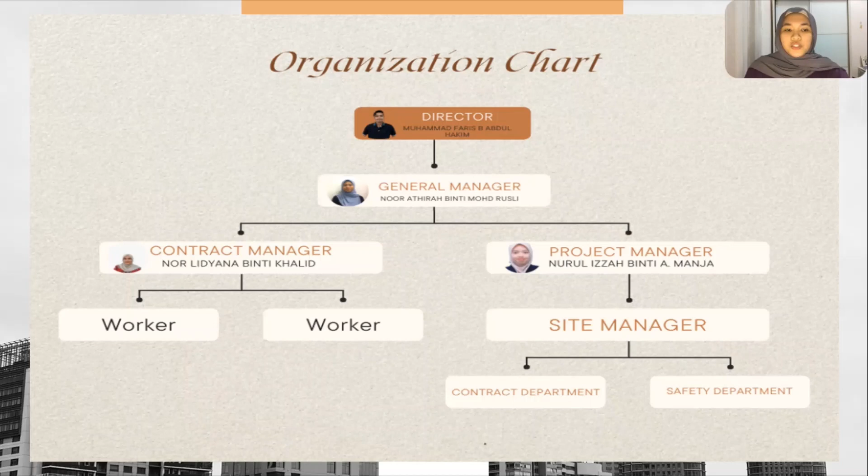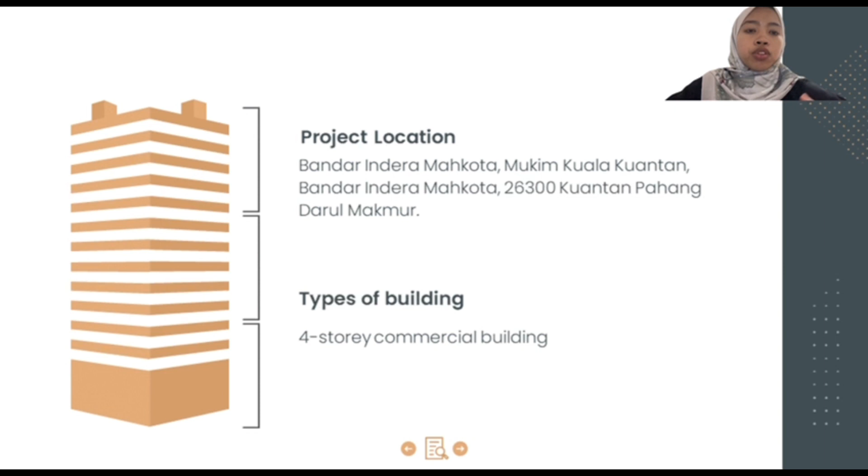Assalamualaikum warahmatullahi wabarakatuh. My name is Nurul Izzah binti A. Manja, CF 200167. I will present about the project background. So the project location is at Bandar Indera Mahkota, Mukim Kuala Kuantan, Kuantan Pahang. The type of building is a 4-story commercial building. So what is the type of commercial buildings? Commercial building can be office building, house commercial activity, warehouses, retail center and resident, or it can be for business professional use.

For the project detail, the project name is the proposal of developing commercial building at Bandar Indera Mahkota, Kuantan, Pahang, and the developer or the client is Sentimental Associate Sdn Bhd. The architect is ATZ Architect, and the C&S consultant, M&E consultant, QS consultant, and the town planner are from our company, which is Berjaya Consult. And the company address is at Jalan Padi Perak, Bandar Baru Uda, Johor Bahru.

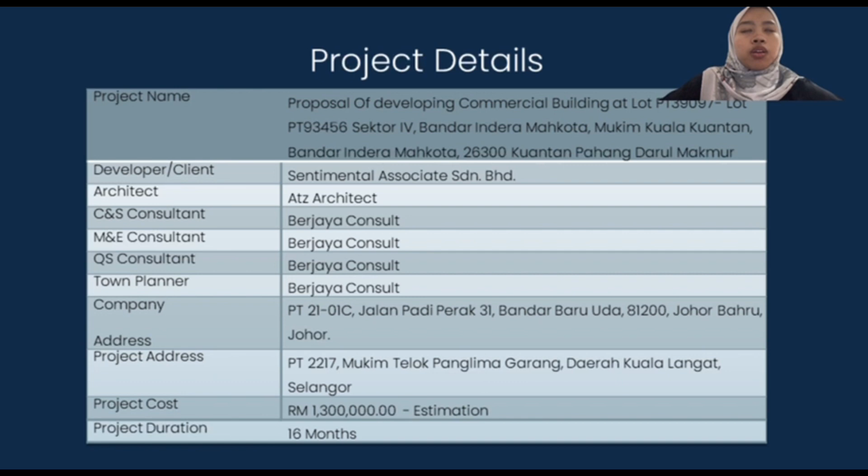Next is the project scope. The commercial building type of space is designed for higher occupancy and can range in size from a single-story building to a high-rise building. In the pre-construction process, all preparation material including bill of quantity, BQ, and drawings such as architectural, structural, mechanical, and electrical drawings must be prepared by our company. The design preparation for the drawing follows the standard specification used, Malaysian standard, which is Euro Code 1 and Euro Code 2.

And lastly, the process of the project also includes the development of infrastructure for the buildings such as earthwork, drainage, sewerage, road, and water reticulation. All the project must comply with the rules and regulations from the local authorities.

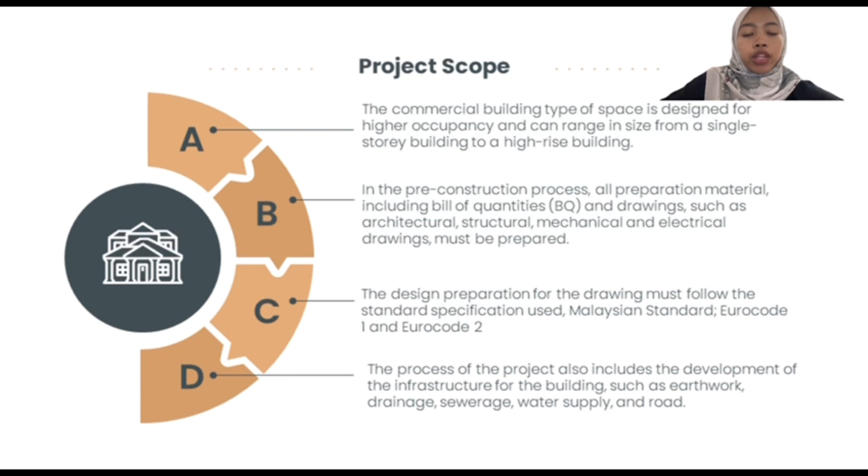Okay, next part, we'll continue with the proposed size and thickness. Depth of foundation. Based on the soil investigation, the chosen foundation to be used is pad footing. It's commonly used for shallow foundation in order to carry and spread concentrated loads caused by columns or pillars. The type of foundation used is necessary to ensure structural safety. When one or more topsoil layers are very compressible and incapable of supporting the load transferred by the superstructure, the bearing capacity is 150 kN per meter.

Okay, the foundation will be categorized into four groups, from Group A to Group D. Group A estimated pile depth is below 4.5 meters, Group B 4.5 meters until 9.5 meters, Group C 9.5 meters until 14.5 meters, and Group D 14.5 meters and above.

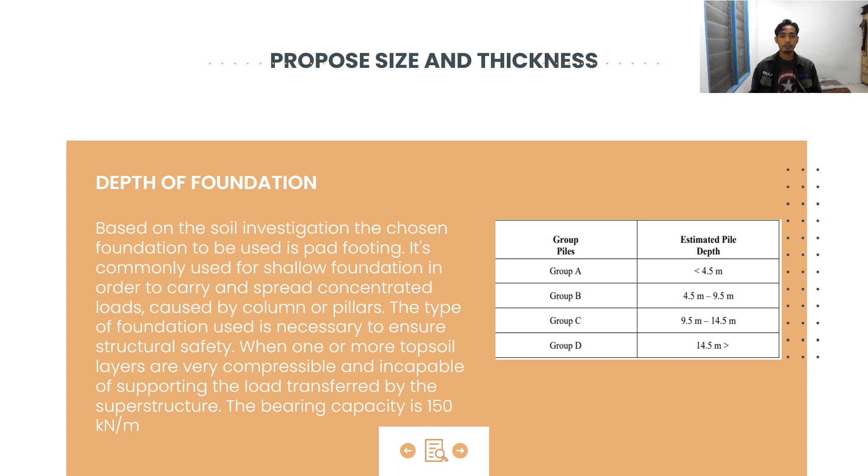The size of the beam. The size of the beam proposed from the ground floor until the third floor is the same, which is the span length and the dimension. The span length is equal to 14,850 and the dimension is 150 times 400 millimeter. So it's the same for the ground floor until the third floor.

Next, for the thickness of the slab. The thickness of the slab proposed is for the span 5A until B, the length is 3,600 and the dimension is h equal to 150 millimeter. Next, for the size of the column. The size of the column proposed from column C1 until column C5 is the same size and the same length, which is the length is equal to 3,000 and the dimension is 400 times 400 millimeter.

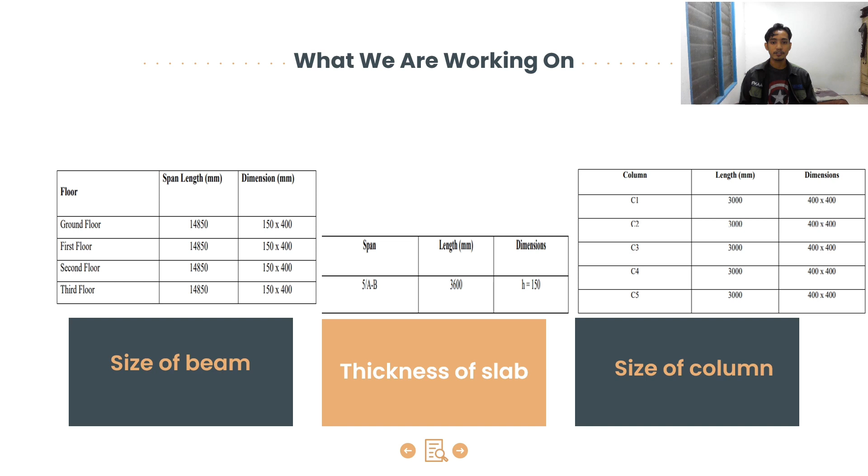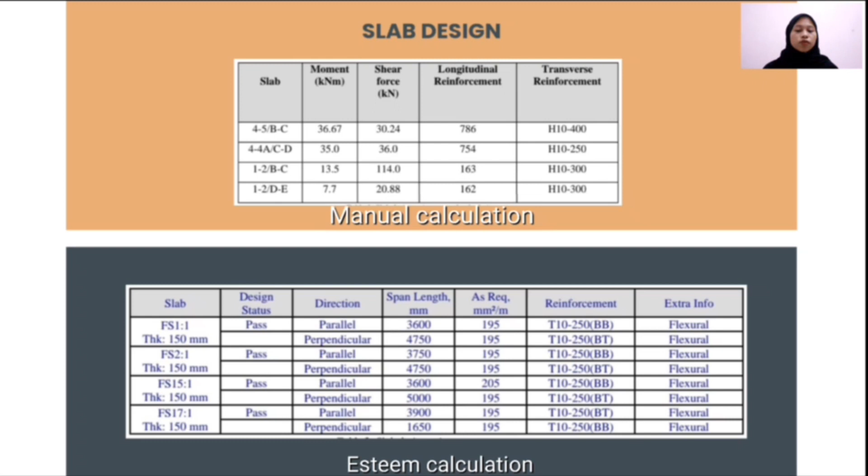Today I am going to present on result analysis. So as you can see, there are two tables, which is the table of manual calculation and the table of calculation from Esteem. For slab design, we provide transverse reinforcement with size ranging between H10-250 to H10-400. Compared to Esteem software, they provide reinforcement with size T10-250 for all sections. While for beam design, from manual calculation, we provide reinforcement with size H6-100 to H6-300, and based on Esteem software, provided reinforcement is T10-250 for all sections.

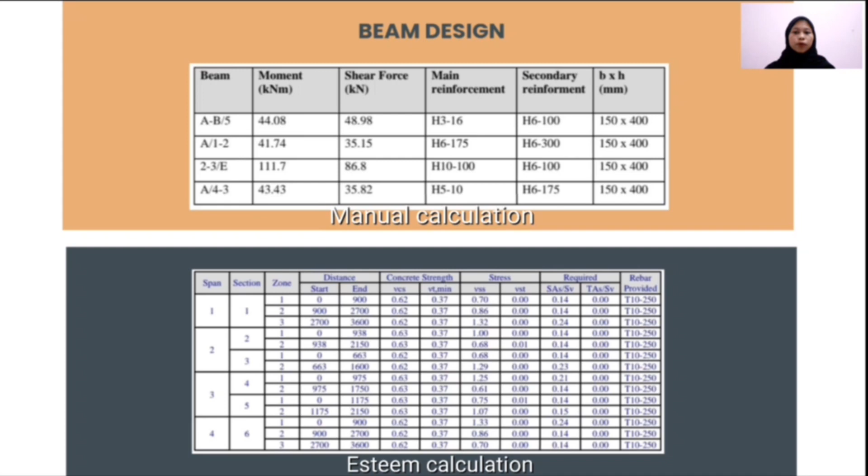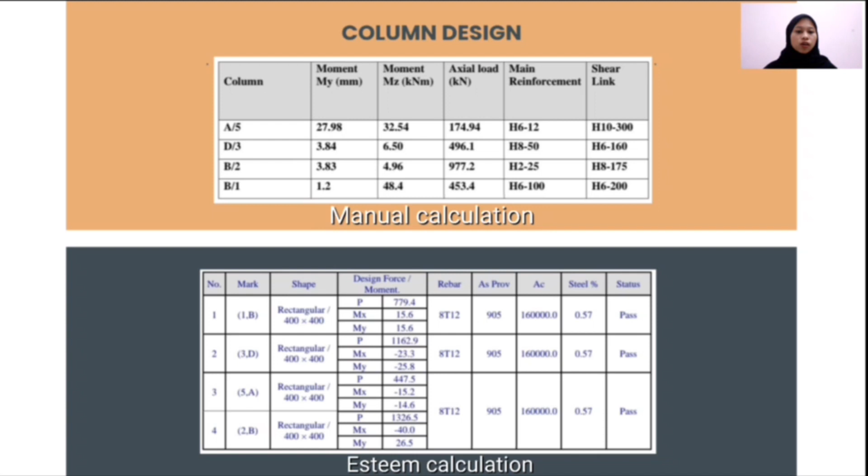Okay, proceed with column design. The reinforcement provided based on manual calculation is between H6-160 to H10-300, while software provided 8T12 for all sections. Next is pad footing.

So for pad footing, reinforcement provided based on manual calculation is ranging between H6-10 to 18H16 for transverse and H8-5 to 12H16 for longitudinal, while software provided between 11T16 to 31T12 for transverse and 17T12 to 30T12 for longitudinal. Okay, by comparing both calculations, it can be concluded that our design is pass and there is no failure during the design phase.

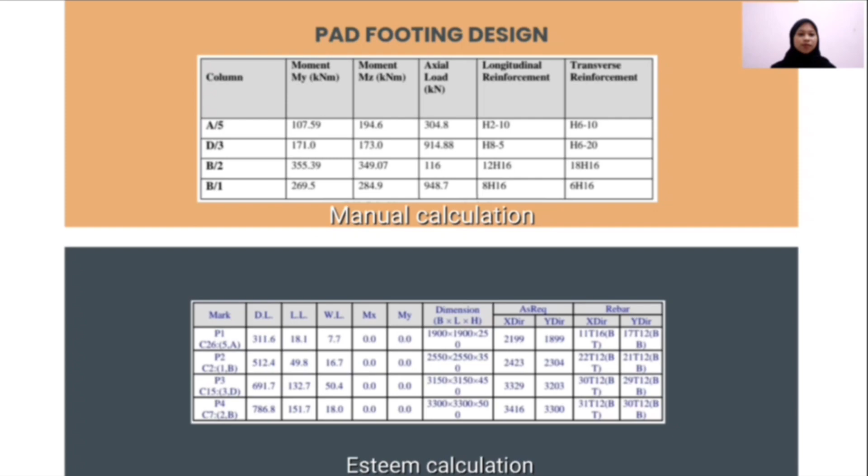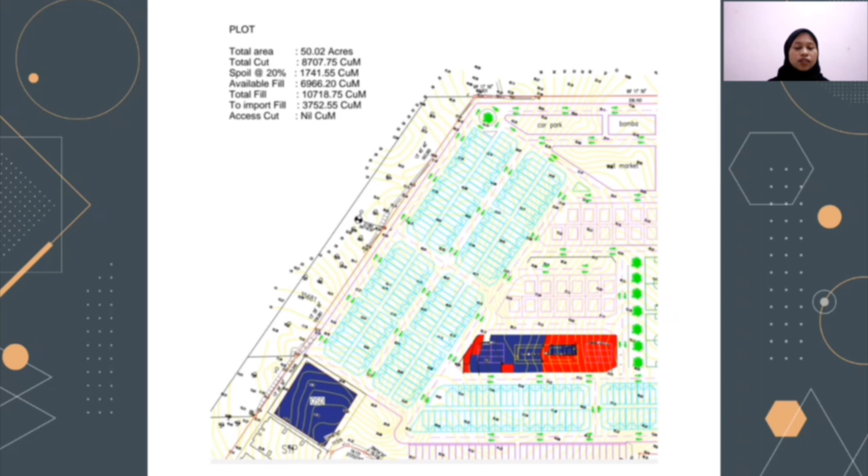I present about the road and drainage. So, the drainage function is to remove the water from the road and surrounding area, and to ensure that the open space provided in the overall layout plan is adequate. The objective of drainage is to propose a stormwater management option for the layout plan approval of a proposed 4-story office building or commercial building in Kuantan, Pahang. The importance of road and drainage cannot be overstated because it removes all excess surface and subsurface water from the right of way.

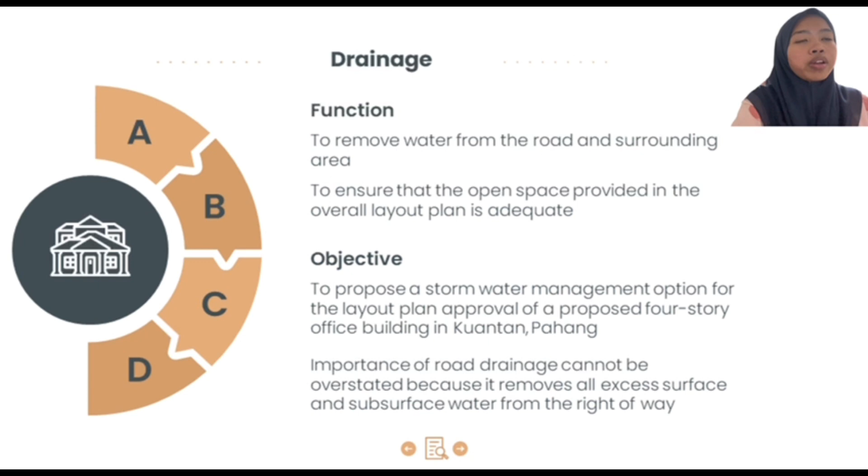Next is the design stage. First, Urban Stormwater Management Manual. Stormwater flow rate after development should be roughly equal to the pre-development condition. Second, aspects of stormwater management: controlling flooding, reducing erosion and improving water quality. Third is best management practice, BMP. Practices that are structural, vegetative, or managerial in nature and are used to treat, prevent, or reduce water pollution. Result: propose that any additional runoff generated by development be directed to a suitable detention facility.

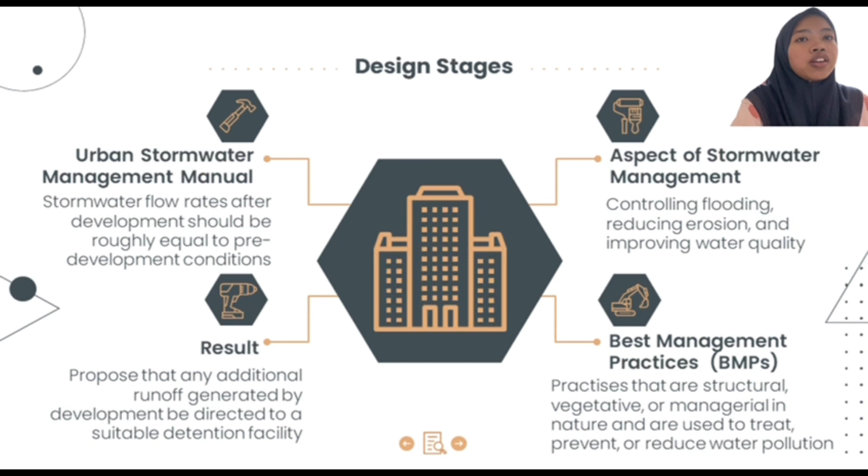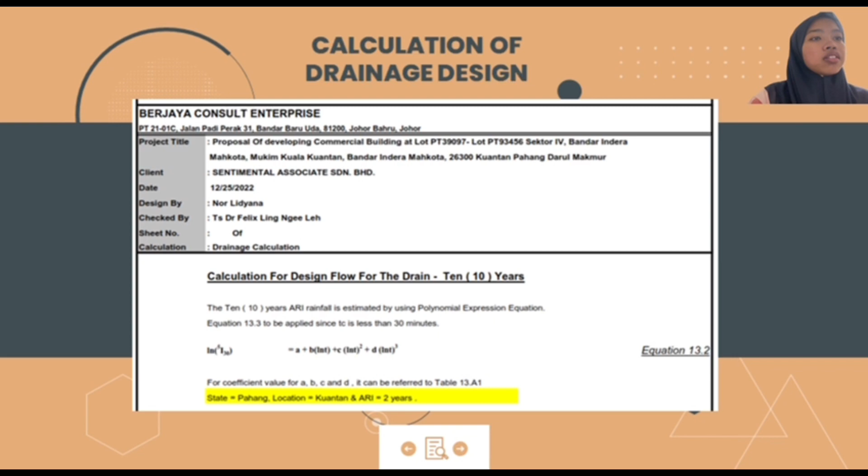Calculation of drainage design. So the calculation for design flow for the drain is 10 years. The location is at Kuantan, Pahang. For the coefficient of the IDF polynomial equation, we choose design ARI of 10 years, and we get the rainfall intensity for 30 minutes is 96.95 mm per hour, and rainfall intensity for 60 minutes is 66.39 mm per hour.

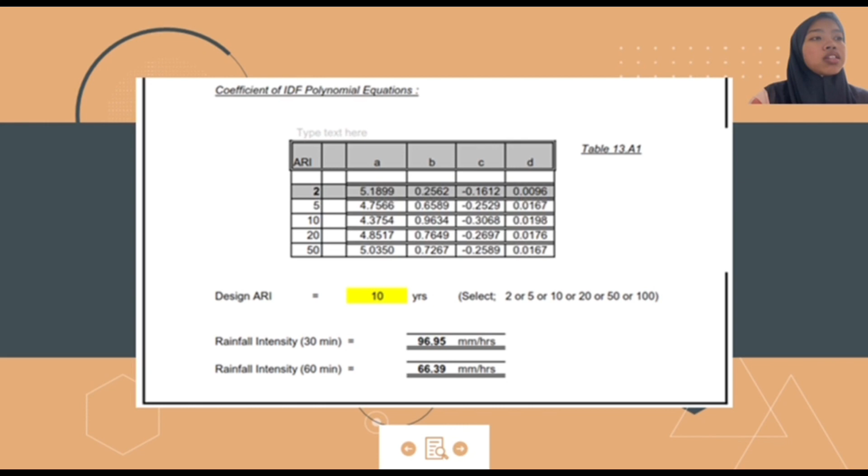For the rational method, we insert the overland distance of 145 meters, drain distance of 519.3 meters, slope percentage 2%, assumed velocity of 1 meter per second, and roughness coefficient N of 0.011 for concrete asphalt drain. The overland sheet flow travel time is 5.37 minutes, and time of flow in the stormwater conveyance system is 8.66 minutes. Thus, the time of concentration TC is 14.03 minutes.

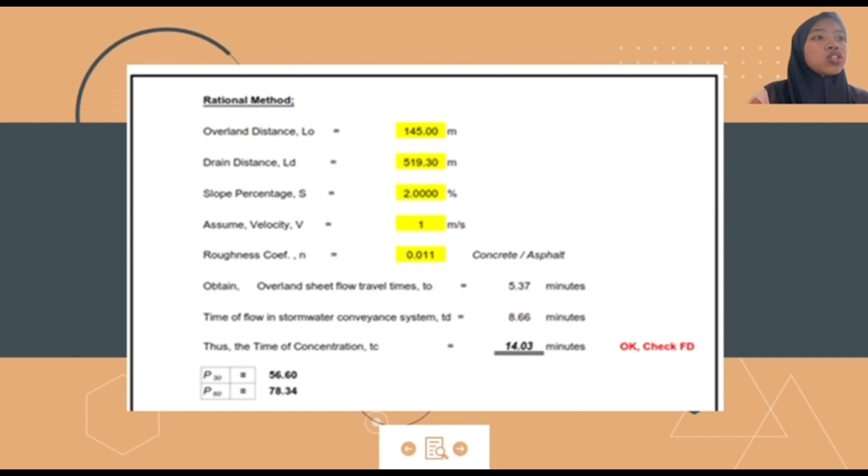Storm duration adjustment factor FD is 0.01. This only applies if the TC is below 30 minutes. The design rainfall depth is 56.38 millimeters, the rainfall intensity is 241.1 millimeters per hour, and the runoff coefficient is 0.9.

The soil condition is urban category 1, and the catchment area for our project is 22.42 hectares, and we get the peak discharge as 13.5 meter cube per second. So from the calculation, we can state this is okay.

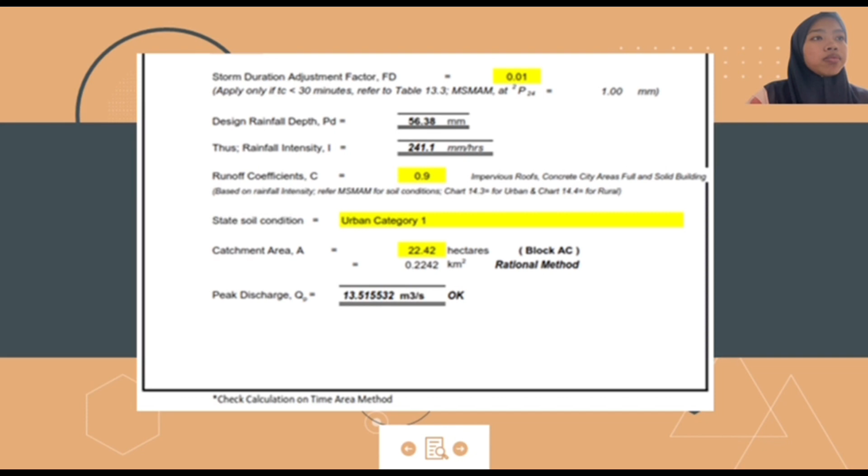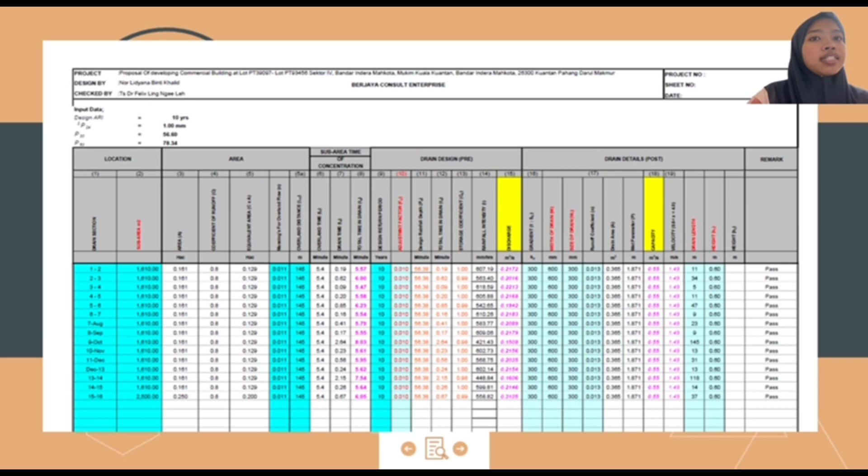Main road is a continuous road with partial access control for through traffic in urban areas, and it basically conveys traffic from residential areas to the vicinity of the central business district, or from one part of a city to another, which does not intend to penetrate the city center.

Collector road is the major road which penetrates and serves identifiable neighborhoods, commercial areas, and industrial areas. Residential road is the basic road network within neighborhoods and serves primarily to offer direct access to a building land, while backlane road is the road at the back of shop lots that connects to the arterial road for heavy vehicles to transfer their goods.

Hence, for this project, we focus more on collector road, which is the road in our construction buildings, which is commercial building.

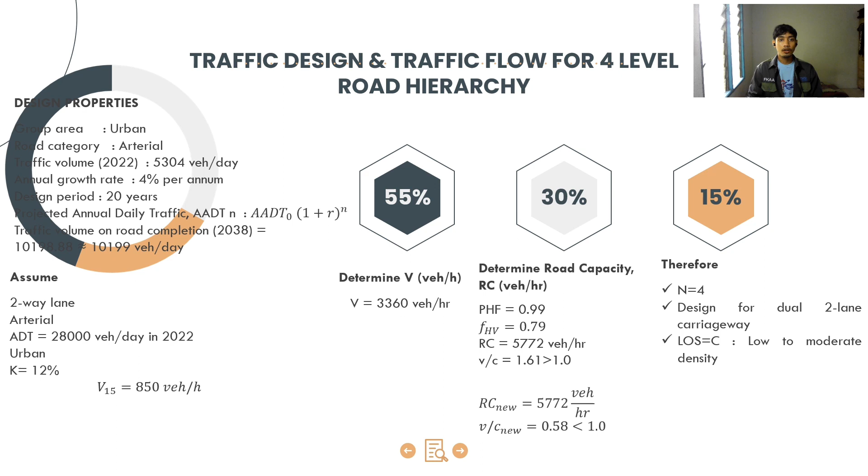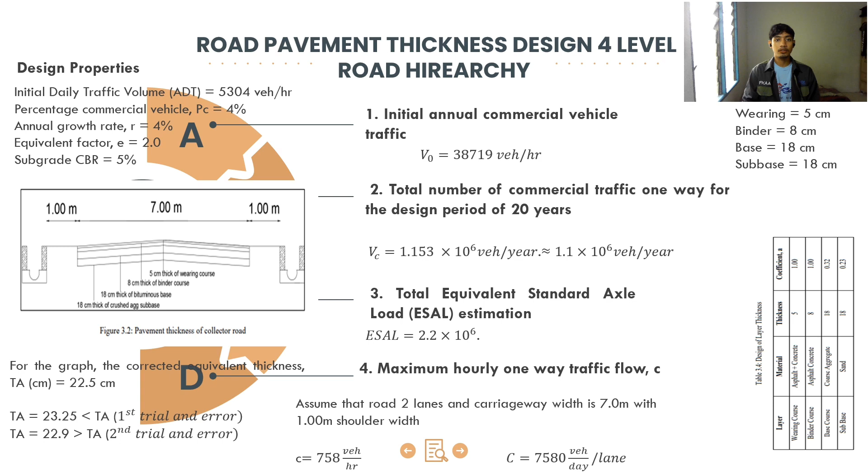Next, I will explain briefly about the sewerage design. First of all, the introduction of sewerage design. Wastewater refers to all effluent from households, commercial establishments, institutions, hospitals, industries, and so on.

It also includes stormwater and urban runoff, agricultural, horticultural, and aquacultural effluent. Effluent refers to sewage or liquid waste that is discharged into water bodies either from a direct source or from treatment plants. Sewage is also wastewater.

It is wastewater originating from toilets and bathroom fixtures, bathing, laundry, kitchen sinks, cleaning, and similar dirty water produced in households and public places. Water used to irrigate turf and gardens, swimming pools, roof drainage, surface runoff, and stormwater are all wastewater but not classified as sewage.

Sewerage is the system of pipes, pumps, and other physical infrastructure that conveys wastewater or sewage from the point at which it is generated to the point where it is treated or disposed.

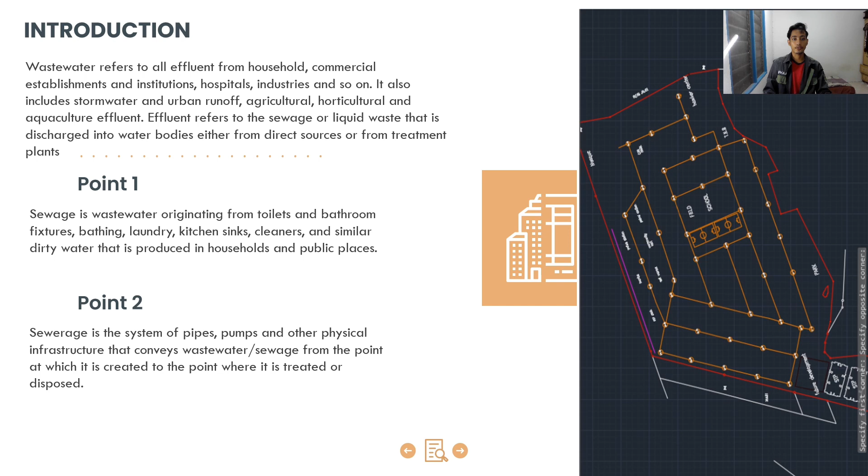Type of sewerage system: it is the system and infrastructure for collecting, treating, and disposing of sewage. There are three sewerage system types: first, separate system; second, partially separate system; and third, combined system. In this project, the separate system is used.

In this system, the sanitary sewage and stormwater are carried separately in sets of sewers. The sewage is conveyed to the wastewater treatment plant (WWTP), and the stormwater is discharged into the river without treatment. The separate system is suitable when a separate outlet for stormwater is available and the topography is such that stormwater can be disposed of in natural drains.

So for the standard reference, we use MS 1228:1991, Code of Practice for Design and Installation of Sewerage Systems. It is used to design the discharge of wastewater flow as required.

Second, we use the Environmental Quality (Sewage and Industrial Effluent) Regulations 1974, as the effluent discharge must meet Standard A and Standard B, which is A for the pipe and B for the manhole. So, design criteria for the pipes and manhole.

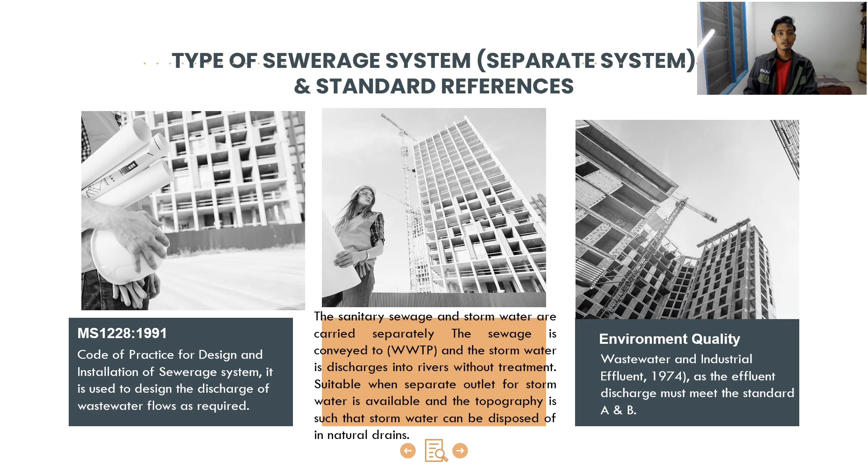First of all, for the pipe, depth of sewers is a minimum of 1.2 meters below the ground surface, and invert depth is a minimum of 1.2 meters. Basically, this depth of sewers is from MS 1228:1991.

Second, for the velocity of flow, minimum of 0.8 meter per second to prevent sludge from settling in the pipelines, and maximum of 4 meters per second to prevent scouring of the sewer by erosive action or suspended matter. This figure on velocities of flow is sourced from MS 1228:1991.

So for the slope of the pipe gradient, which is 1:200 to 1:35, to maintain the velocity.

So the size of the sewer: first, it must be sufficient to handle the total discharge Q, which should be greater than peak flow total. Second, minimum size is 200 mm, and reinforced concrete pipe available size range is about 150 mm to 3000 mm. Basically, the size of sewer is also sourced from MS 1228:1991.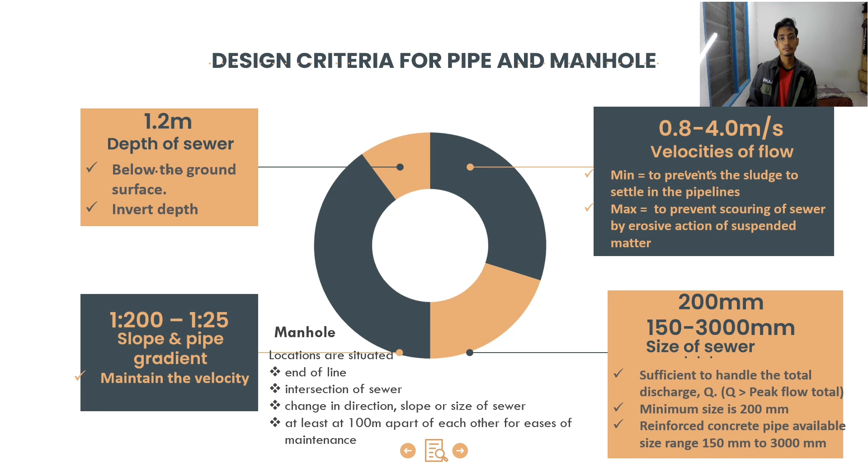For the design procedure, there are 6 steps: first, network sewer planning; second, sewerage layout plan; third, determination of population equivalent; fourth, determination of peak flow, discharge, type and size of the pipe; fifth, determination of velocities and invert level; and sixth, summary of sewerage design.

Step 1 is network sewer planning. The sewerage pipe must be located in the surrounding area of the road. The pipe to be located in private property due to certain topographies must apply for permission from the individual before construction can begin.

Before any construction work can begin, the layout and overall existing building, pipe, and electrical must first be determined. During construction, separation of sewer and main water should be required with a minimum horizontal separation of 3 meters and a minimum vertical separation of 46 cm from water mains.

For the second step, this is our sewerage layout plan for the proposed site. The third step is determination of population equivalent and type of sewerage system.

We calculate the population equivalent, PE, by totaling the population equivalent from the proposed site. For type of sewerage system: if greater than 150 PE, it commonly uses a complete system with sewer network, NPS, and STP. If below 150 PE, it commonly uses a septic tank and connection.

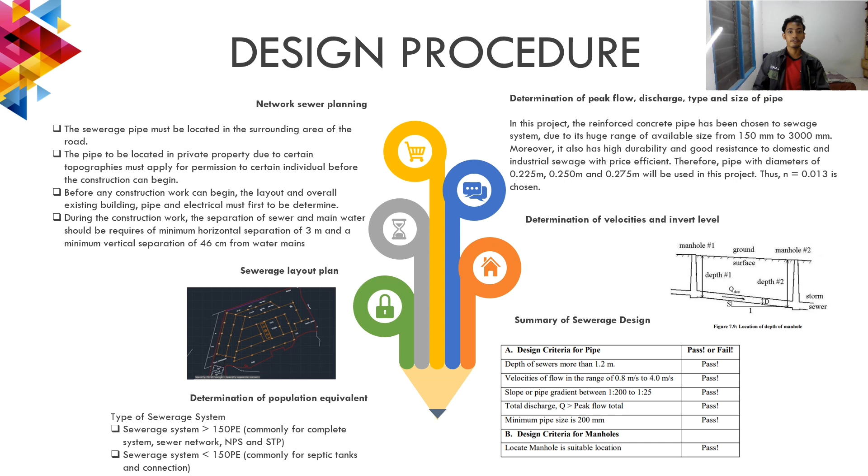The water reticulation system: there are numerous sources of water including rivers, lakes, and streams. The water distribution network is a component of every mature social structure. It is an infrastructure layer consisting of pipes and fittings. The purpose of the regional water supply system is to provide all of the water required for human consumption.

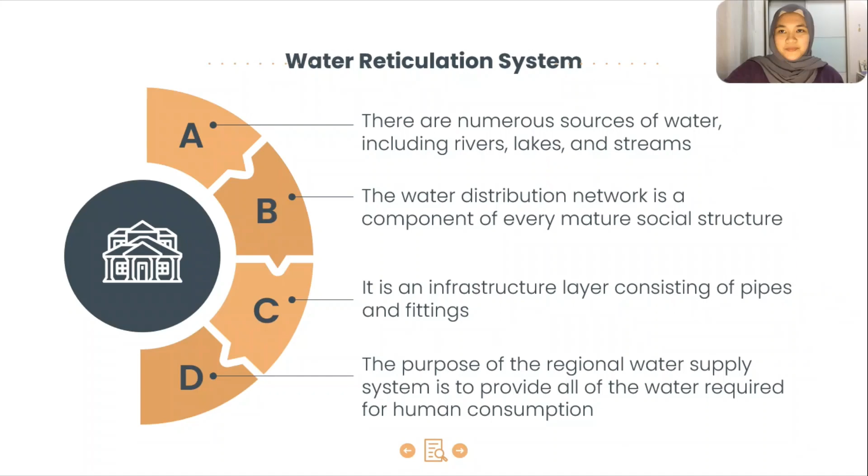Phasing and demand: the daily demand is estimated using water consumption rates extracted from the Malaysia Water Association. Computation of demand: for a 4-story office building, it is 1,800 GPD per room.

Source of water: the water source and tapping point shall be derived from the existing SADA main, designed by engineer consultants chosen by the developer.

Distribution of pipe network: the distribution system shall be comprised of mild steel pipes, valves, and appurtenances, all in accordance with SADA specifications. At road crossings, mild steel pipe will be coated inside with cement mortar and bituminous felt will be given externally.

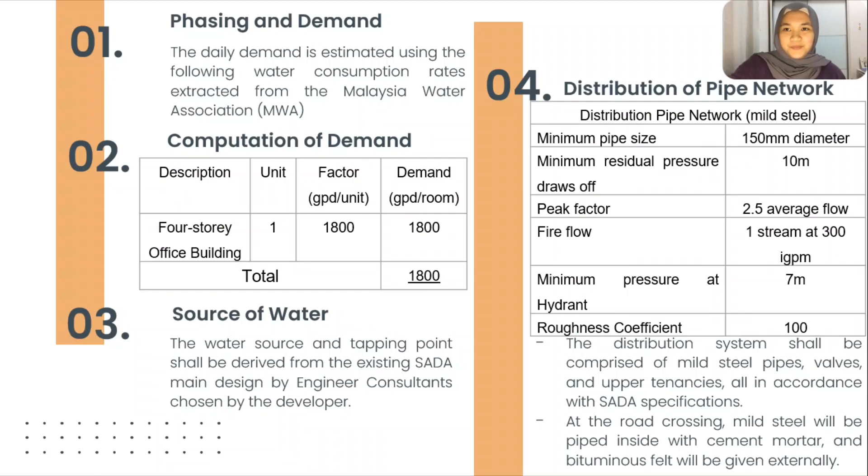Hydrant flow: based on Malaysia Water Association requirements, our proposed construction falls under Class B, so only one hydrant flow of 2,700 liters per minute is used simultaneously for the entire region.

Our daily water demand is 0.02803 liters per second. Our hydrant flow is 45 liters per second. Our total water demand is 45.03 liters per second, and our peak flow at node 2 and peak flow normally is 0.07 liters per second.